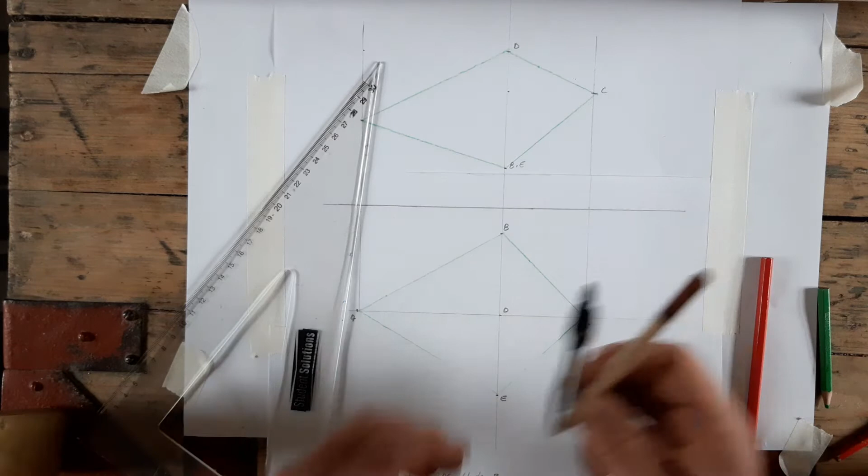Okay, now with that set up from the last video, the next thing I have to do is draw a semicircle here between BCE. You're told it's a semicircle, so I'm drawing a semicircle from B to C to E. Okay. And then it's an ellipse between ABE.

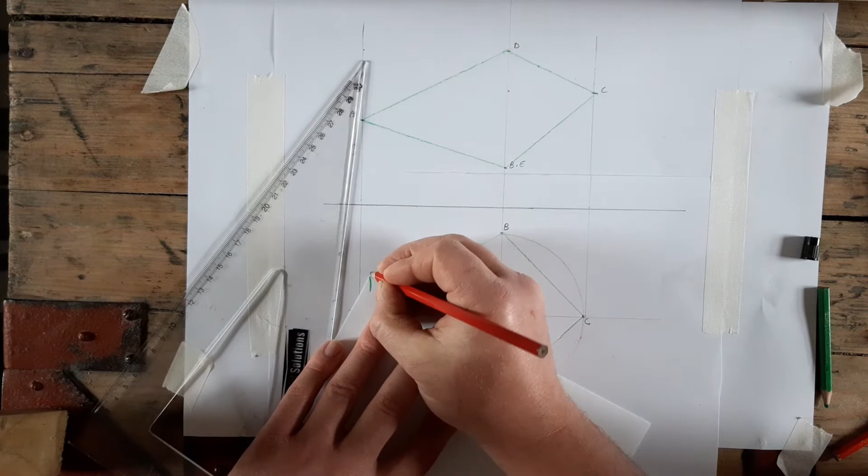So I'm going to use my trammel. I'm going to get half the major. I'm going to get half the minor. And I'm going to keep major on minor, minor on major. And I'm going to get my dots for my ellipse down here. Very important that you hand up the trammel at the end.

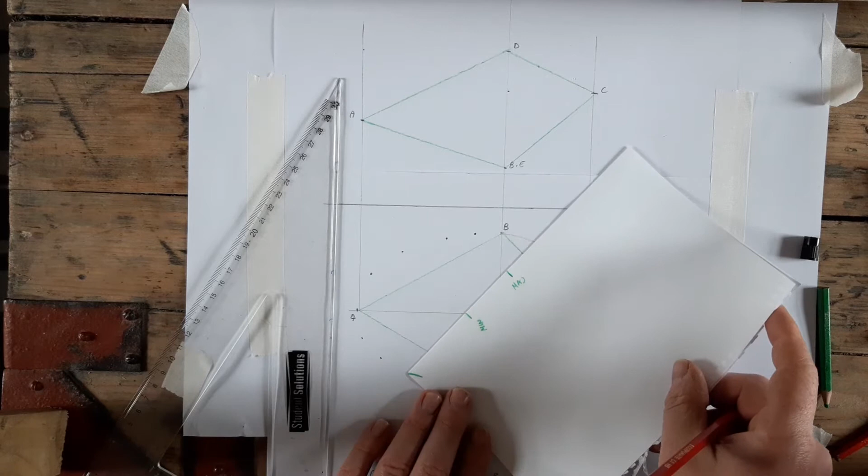And I would always advise that my students should use tracing paper, because if you ask for blank paper in the exam, they're going to give you a big A2 sheet, and it's very awkward to use a big A2 sheet in the exam. So just ask for a sheet of tracing paper. It'll be A4 in size, and you can easily make up your trammel. Okay?

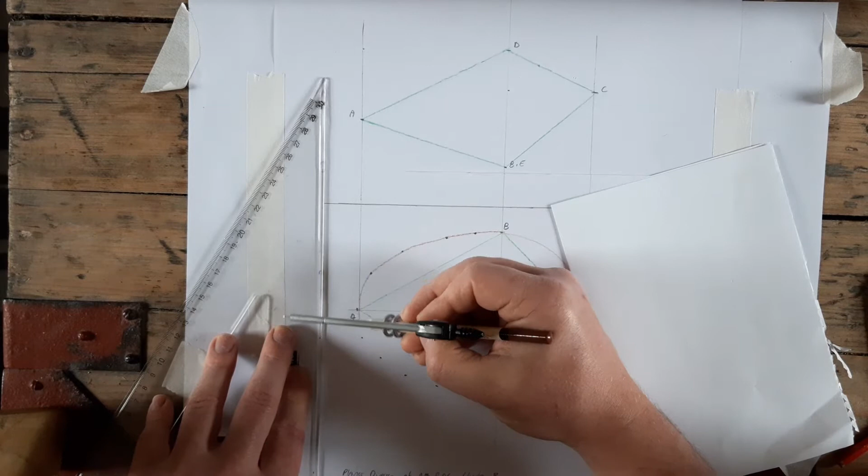Now, that's my dots got for the ellipse. Join them up. And I've got my ellipse down in plan. Now, next thing we have to do is get our straight line elements into place. And we were told in the question to use 4. So I'm going to use 4 as advised.

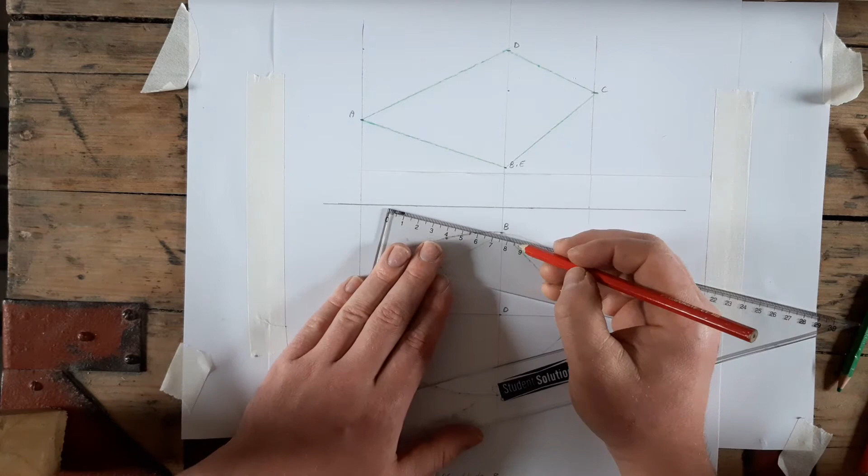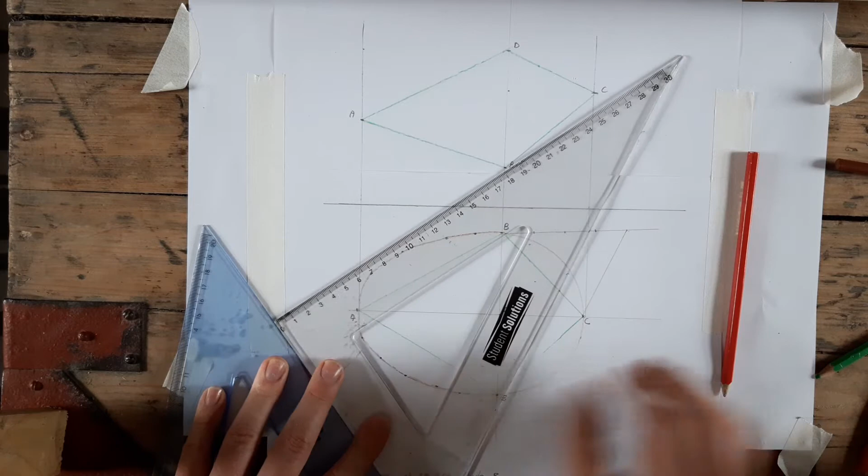So I'm going to divide one of the 4 lines up into 4 equal parts. Any angle I like from any end of the line, come on out. I'm going to mark off 4 20s. I'm going to join the last one back to the other end of the line. So I decided to divide up BC. I could divide any line, it doesn't have to be BC. It could be any line you like. And using similar triangles, I'm going to divide up the line, just like what you would do in maths.

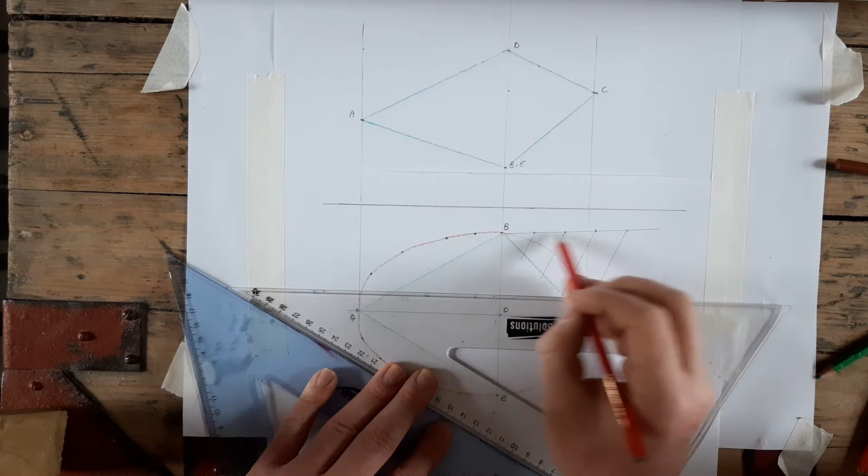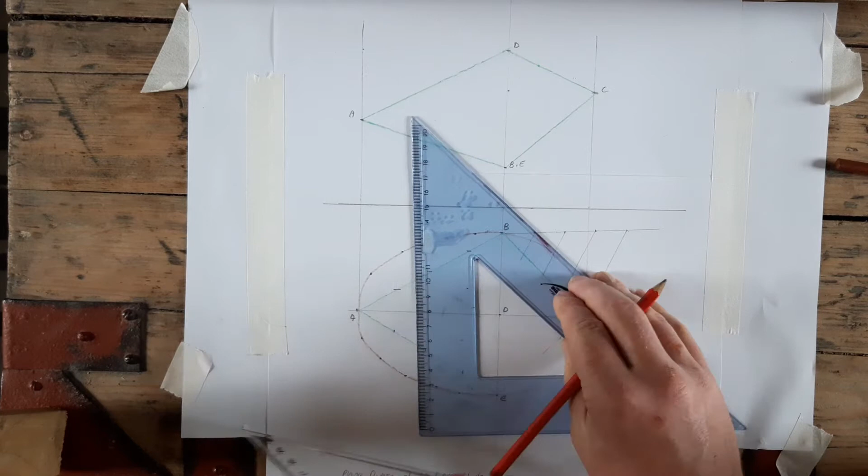So that's it divided. And then I'm going to bring them across, and I can use them to divide up the line AB. So I'm not using the construction now, I'm using the finished position. Sometimes I see a lot of kids using this line to divide up these. So there we go, all done. And I'm also going to bring them straight down as well. Go. And I'm going to bring them back across again.

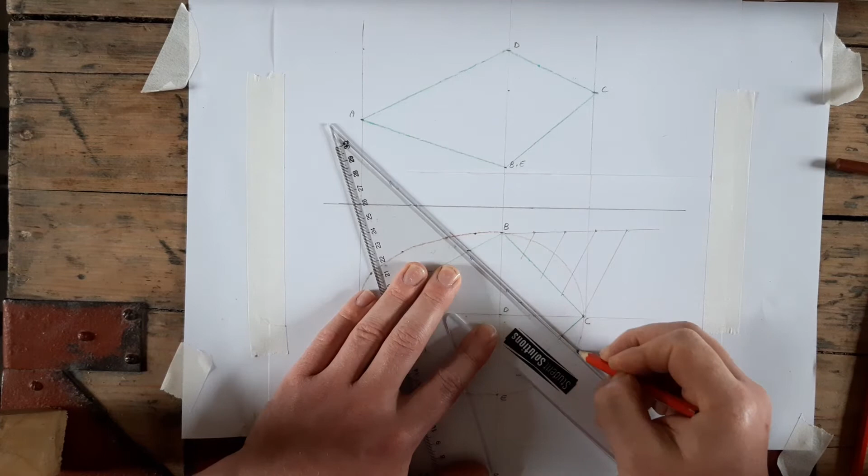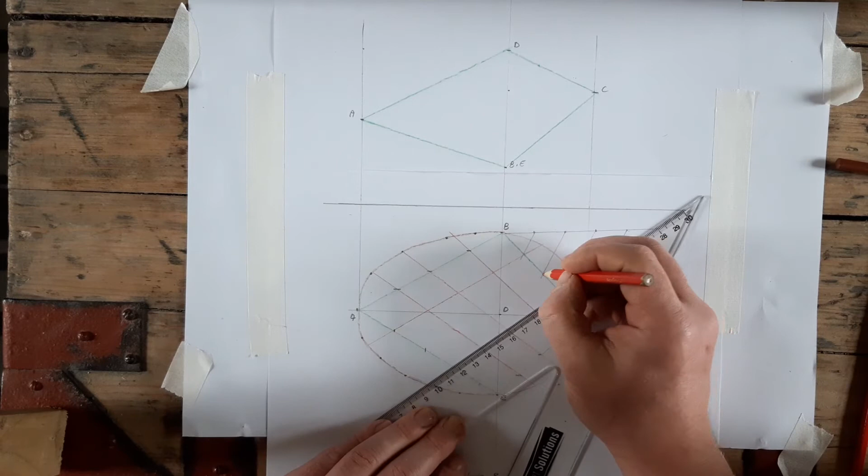Now, I'll put the mesh into place now. You have to make sure you go across the object with the straight line elements, okay? Go right across the object. Don't only divide up half the object. There's a couple of ways of remembering this. If you notice that the line AB and EC don't have a letter in common, and I'm joining across to them. Equally, BC and AE don't have a letter in common, and I'm joining across to them. And that ensures that you get the mesh accurately. Join elements that have nothing in common with each other with the mesh.

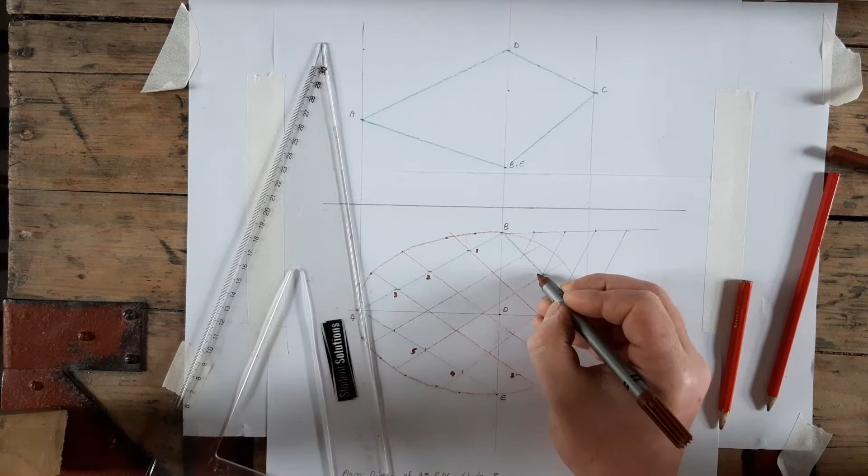Now, I'm going to label this up next then, for the purpose of the question up above. So 1 goes across to 1, 2 goes to 2, 3 goes to 3, 4 to 4, 5 to 5, 6 to 6. I'm going to find them in front elevation. I'm going to find them one line at a time, and I'll explain to you why now.

So I'm going to get 1. 1 is on the line AB. I bring it up. I find it on the line AB. 1 is also on the line EC. I bring it up. I'm going to find it on the line EC. I'm going to join 1 to 1 with its straight line element, and I'm going to go outside the object. I'm not going to stay just inside the kite. I'm going to go outside the object.

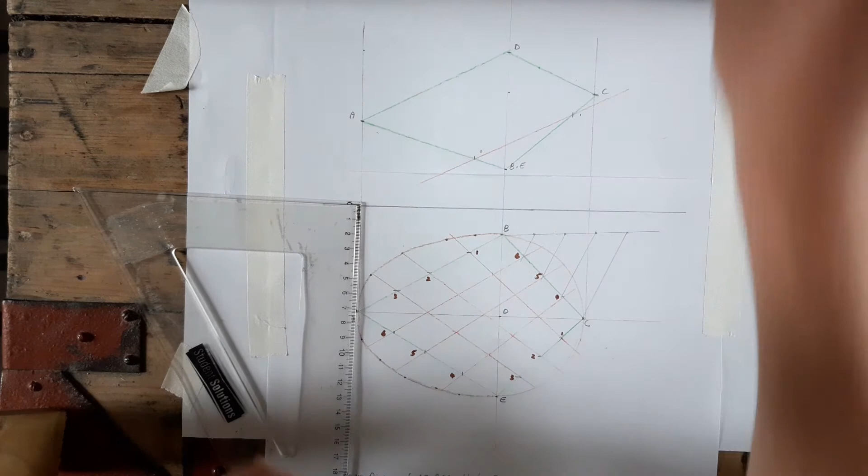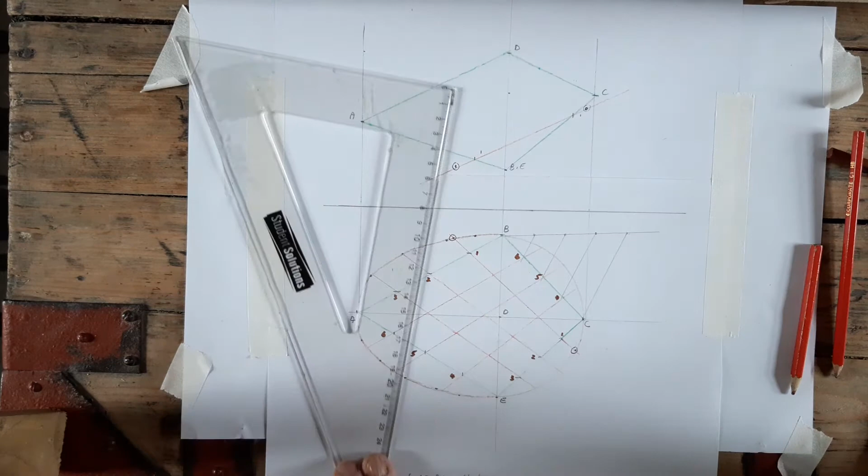Then, where the straight line element crosses over the semicircle and the ellipse in plan, I'm going to bring them up, and I'm going to find them on the straight line element in front elevation. There will be one dot, and there will be another dot. And those dots are on the curve that we're trying to find in front elevation. I just repeat the process for 2, 3, 4, 5, and 6.

So I'm going to do it for 2 now, and bringing up 2 on line EC, join 2 to 2. Where the straight line element 2 is on the ellipse, I'm going to bring that up as well. That gets another point on the outside curve, and that gets another point on the outside curve.

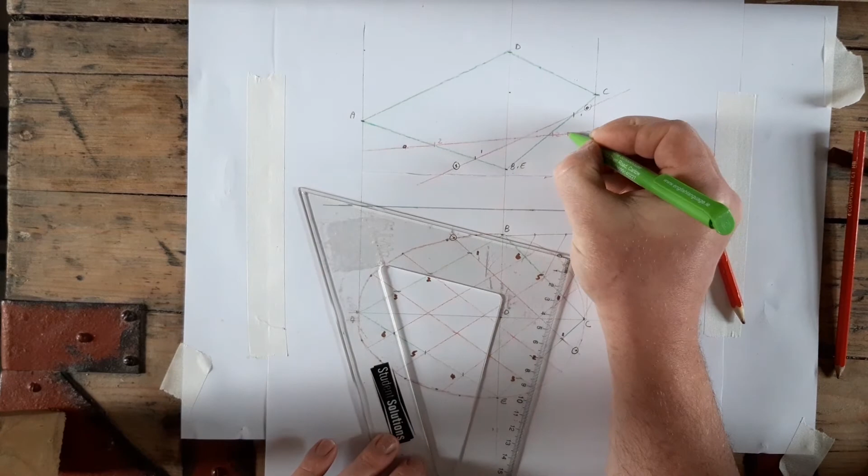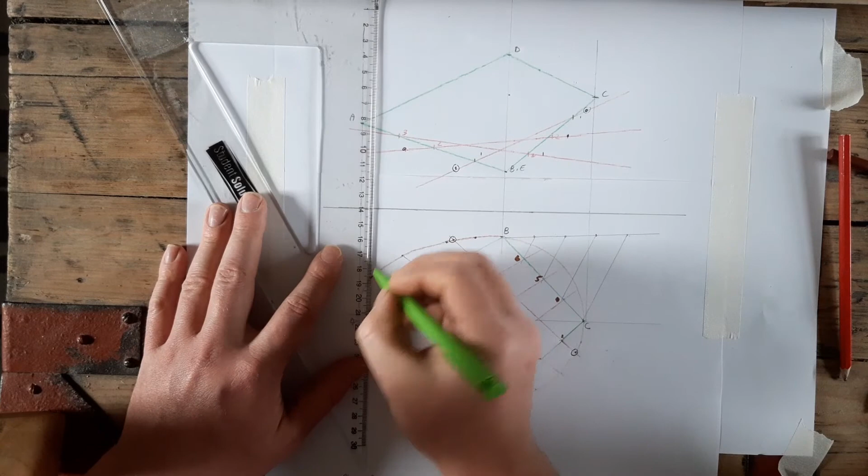And then finally I'm going to get 3. And that gets this here. And again, I bring up where 3 is on the semicircle. And I bring up where 3 is on the semi-ellipse. So now I have these dots here, all the way around. I also have the dot at B and E. And that's what I join up freehand to get my undefined curve in front elevation.

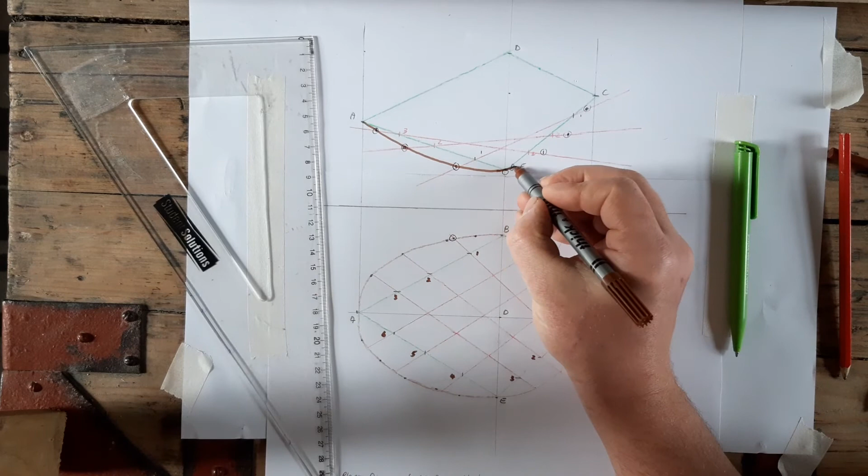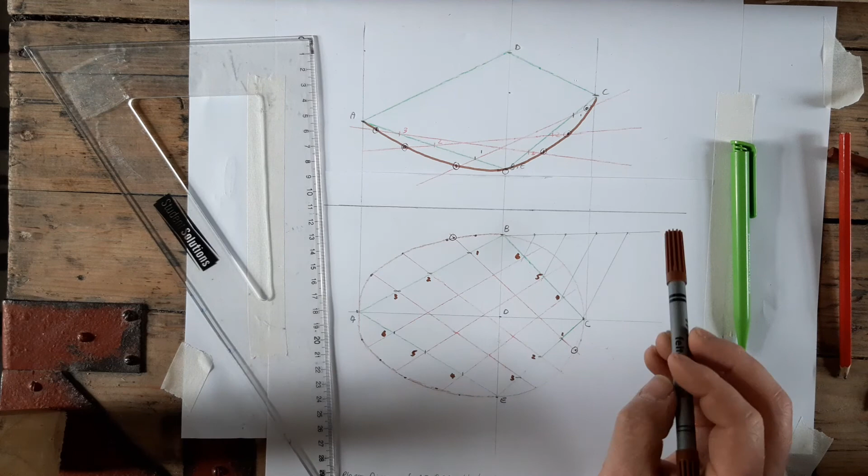Now, you aren't asked in this question to do this, but you could be asked to draw an end view in this question. For example, from B to E. Now, you need to understand what this would look like from B to E, BDE. The curve BDE in end view, in this case, would be a perfect parabola. Okay? You could be asked that in the question, just something to keep in mind. But we're not asked that today.

We're asked instead to get the plane director of AB and DC through B. And we'll talk about that in the next video.